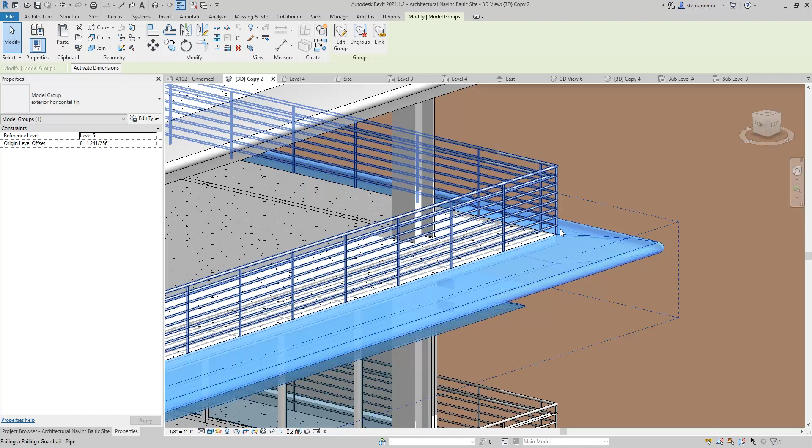What we're going to do is show you how to create a horizontal solar fin on a panel using components. We're going to go to level 4. Depending on your design or how tall your building is, you could start on whatever level you like, but this is a quick tutorial. So as you can see, we're on level 4, and we're going to place the horizontal fin along the entire perimeter of the floor plate.

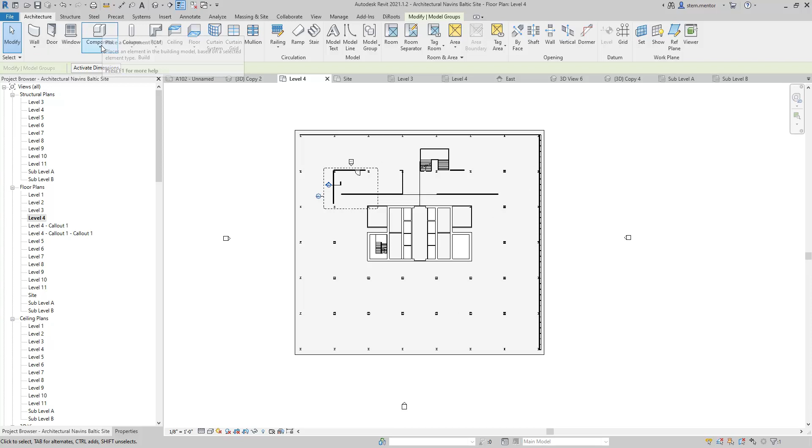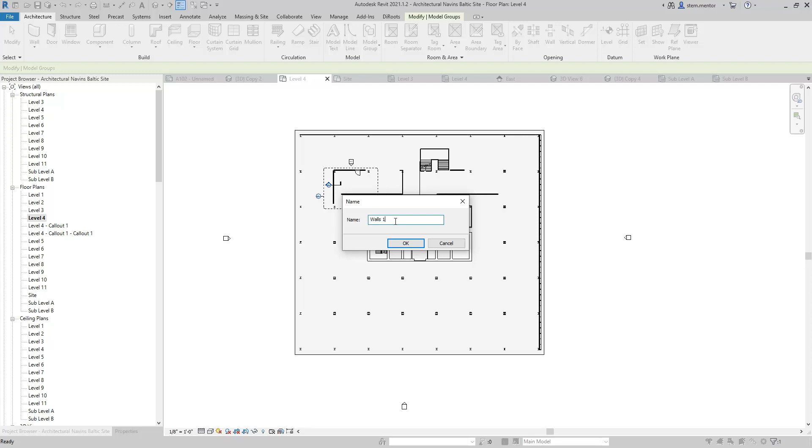We go over to architecture, click on component, then click on model in place. Once we're in model in place, we're going to select the family category. The family category could be whatever you specify; for this session, we're going to place it on walls. Click walls here, and since it's an exterior curtain wall system, we're just going to put it on the walls. We're going to call it a solar fin.

Now what we'd like to do is create it under forms—go to sweep, click on sweep, and then create the path. Click sketch path and click the rectangle. Depending on the shape of your building, you're essentially just going to follow the exterior envelope of your building with whatever shape you need. Because this building is square, we're going to use the square, along the entire periphery. Then click the green check.

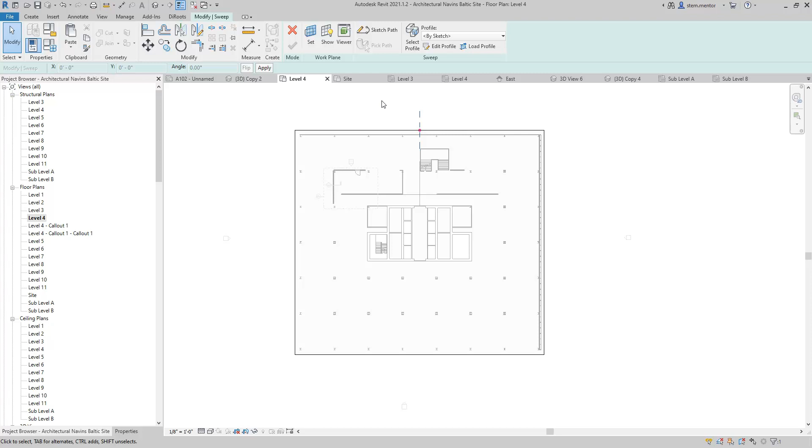Now once we do that, we have the path, we have the trajectory, and now we have to create a shape. So this is where you click edit profile. If you see this blue dashed line, that's the profile that runs perpendicular to the actual trajectory or path, and we want to sketch on this plane here.

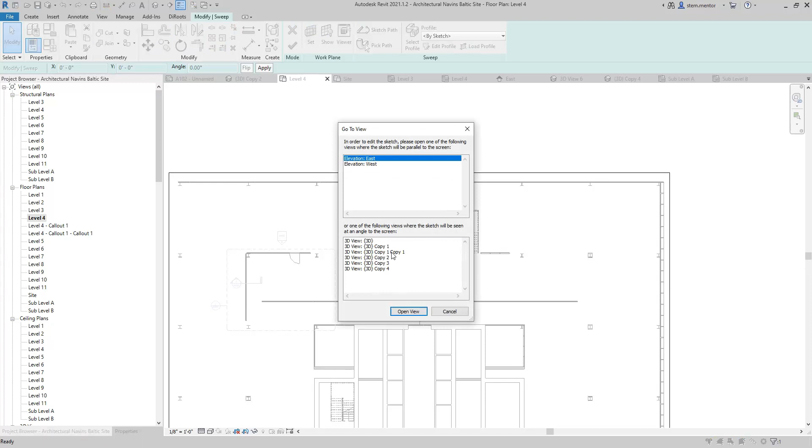Click edit profile, and you'll see where it wants to take you. We're going to do this in a 3D view—let's click the first one, or maybe the second one. You could do this in an elevation, but for this session we're going to do it in a 3D view. Again, I'd like to repeat: you want to make sure you're sketching on an appropriate plane.

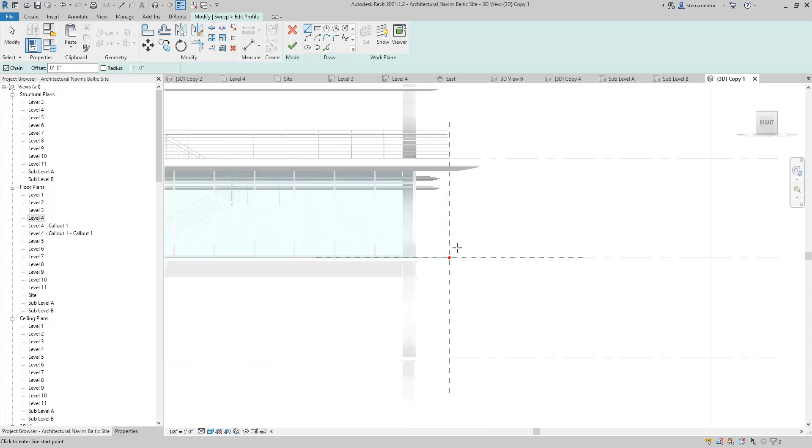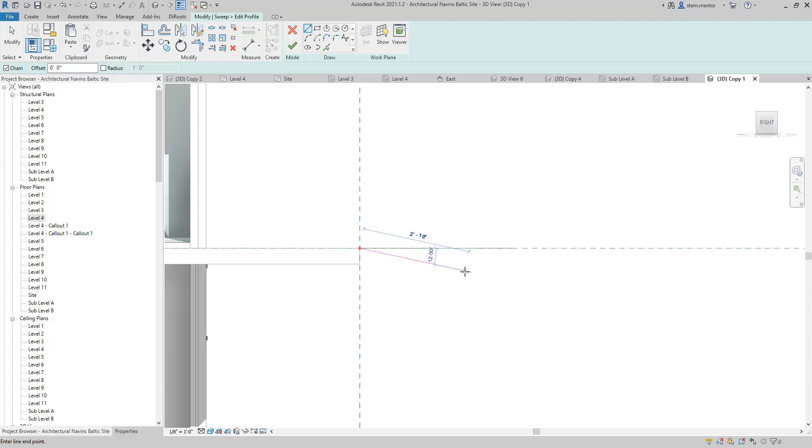So here we have just a preliminary design of an 11-story building, and this floor slab here is extending outward beyond the face—that's to catch the fins. Now we're going to do a preliminary fin, so start here in whatever shape you like. We're going to mimic what we have here.

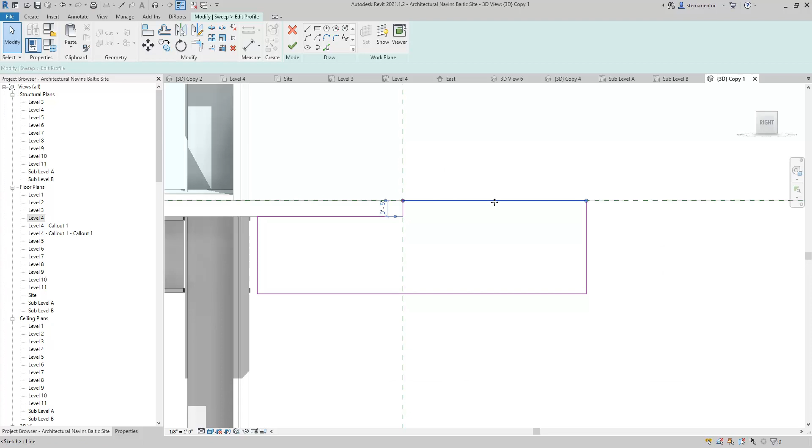Right now I'm going to start—let's see, I'm just going to do a rectangle, and then we're going to refine it. Okay, so I have this shape here. Now what I'd like to do is create something a little more aerodynamic. Again, this is just a starting shape; it doesn't have to be exact. You can refine it as you go along.

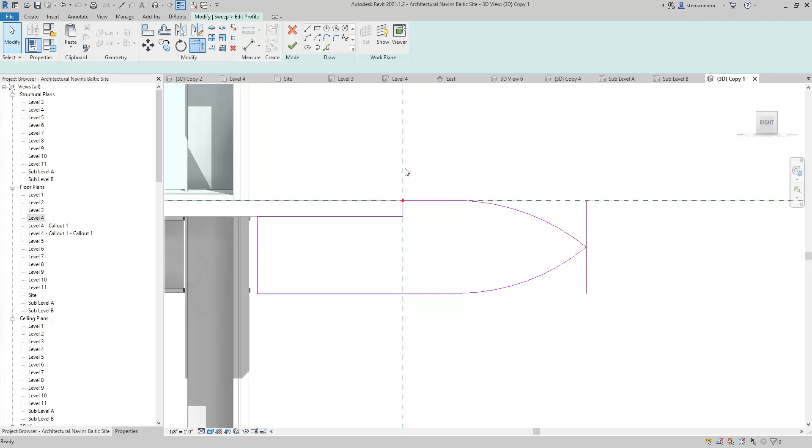So what I'm doing is just using the simple sketch commands to get a shape going. In this function we're in now, we're just pretty much sketching a profile. Now if you don't want your fin to be solid, what you can do is offset here, and then it'll pretty much be hollow in the end.

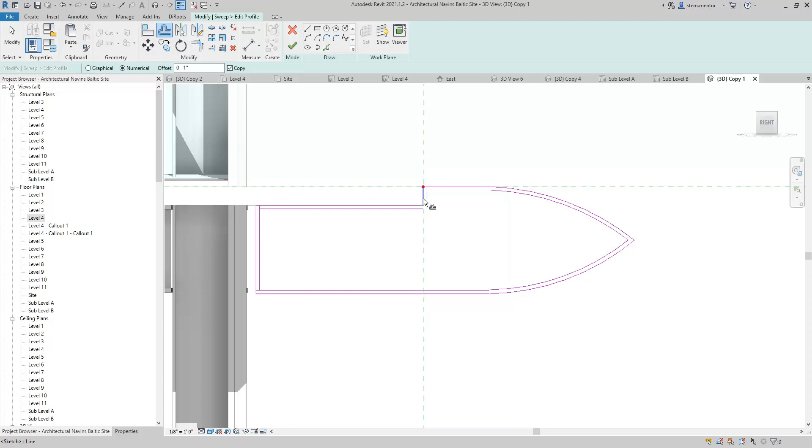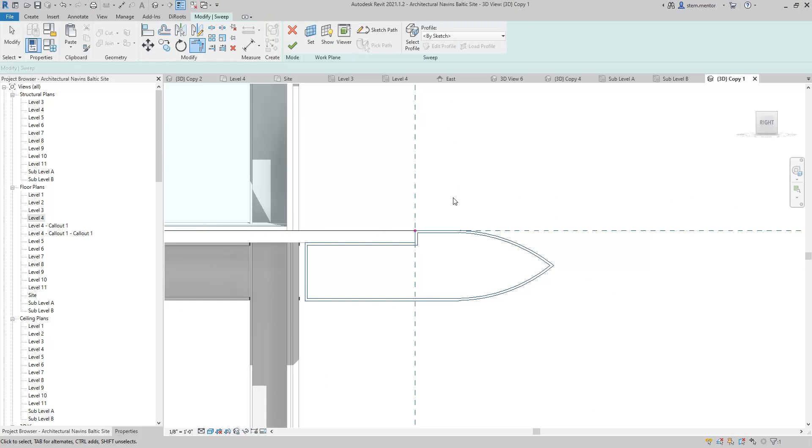You want to make sure you clean up edges like this. Now this is pointy—we can round it off, but for now we're going to leave it like this. Then we want to click enter, and then click enter again. And then you see what happened? It's actually created. So we're going to click enter.

And then in our 3D view, you can see that this horizontal fin goes along the entire periphery of the building.

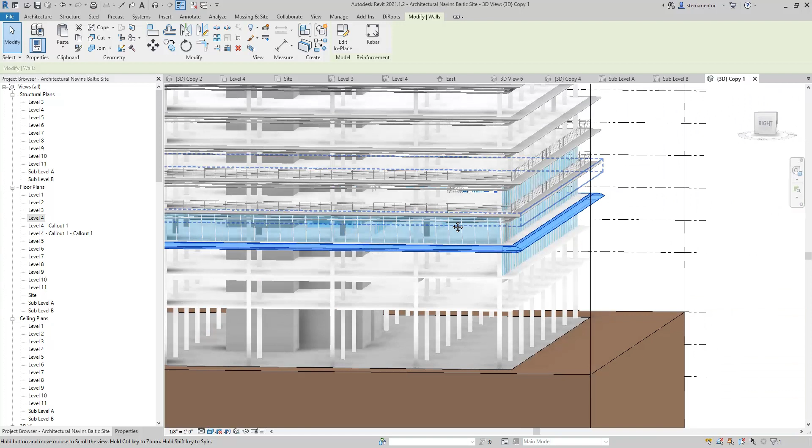And that concludes our lesson on creating a horizontal solar fin that goes around the entire periphery or exterior of the building. In our next episode, we'll go into creating a family where you can essentially do the same thing. Take care.